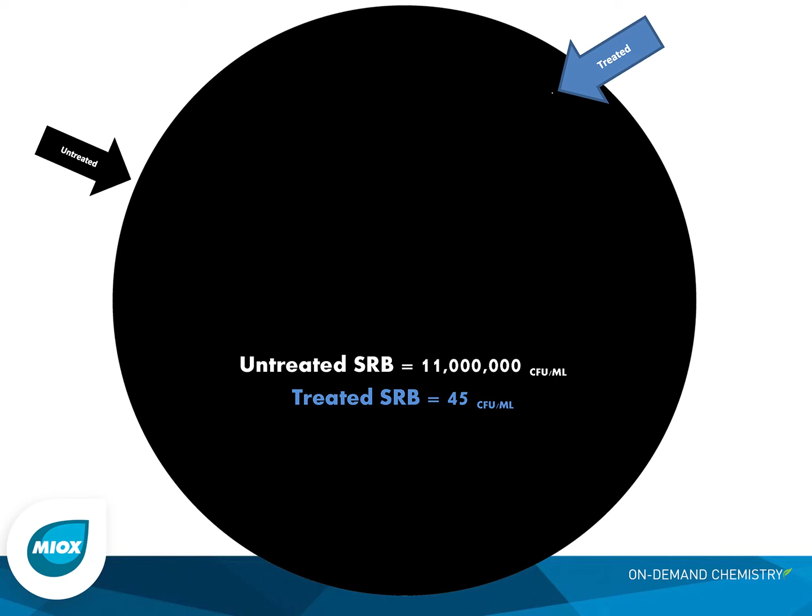That large kill is indicative of oxidant type technology. So mixed oxidant can actually get that type of kill, whereas your conventional biocides can't achieve this level of kill and this quickly.

So what is mixed oxidant actually? So mixed oxidant is actually where we take a salt solution, so we take brine, regular sodium chloride, we electrolyze it through a titanium anode and a titanium cathode, and we create what's called mixed oxidant solution. So we actually liberate sodium hypochlorite and hydrogen peroxide from this solution to treat the produced waters. So we batch dose mixed oxidant into the produced waters to achieve these kinds of kills.

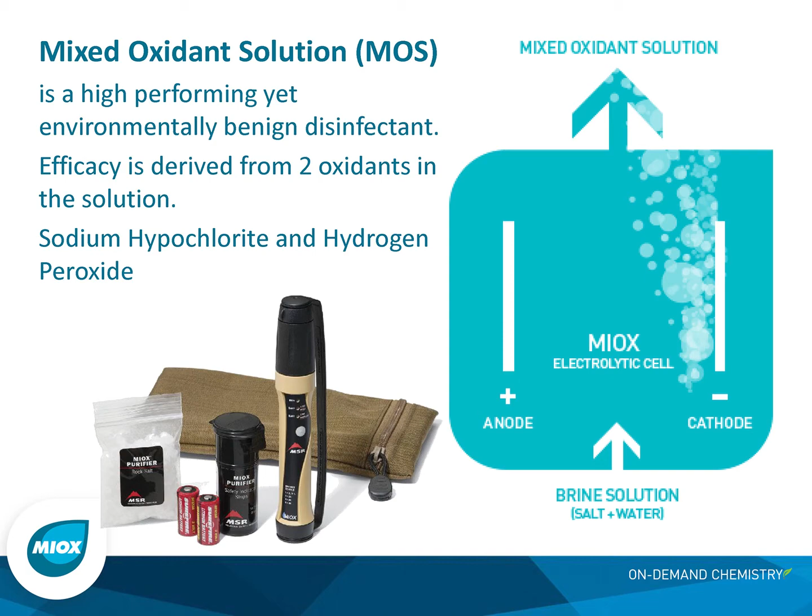Now, what does this mean? This means to the oil and gas industry, Bacillus globigii is much harder to kill than SRBs, APBs, and things like that. So we get a much better kill and much faster, and we definitely have something more than sodium hypochlorite. This test was actually validated in third-party studies by the Centers for Disease Control.

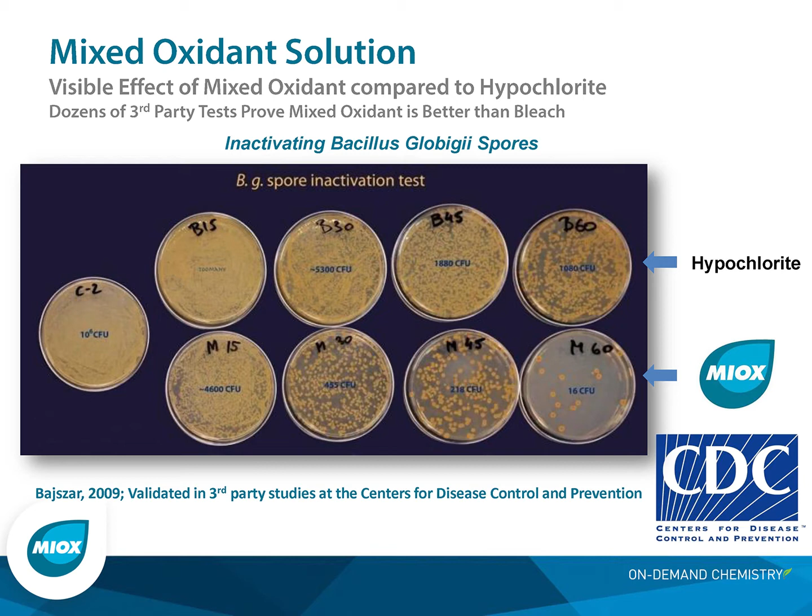MIOX is the leader of on-demand disinfection. We've been in business for over 18 years. We expect to be here at least 18 more, so we're going to be here when you need us. We have scalable technologies, we have multiple chemistries, and we address many, many markets, such as municipal water, food and beverage, industrial and cooling, agriculture, semiconductor, and of course, oil and gas. We have 48 patents pending or issued to date.

We have multiple chemistries, which other companies don't have. So we can do mixed oxidant, we can do regular sodium hypochlorite, we can do an advanced oxidation process, and we can also do an eQUAT, which I like to consider as a dual biocide.

So for an oil and gas application, this is where you actually get that large kill with oxidants, but we can also put a conventional biocide in there that won't interfere with the oxidants and leave that water sterile longer.

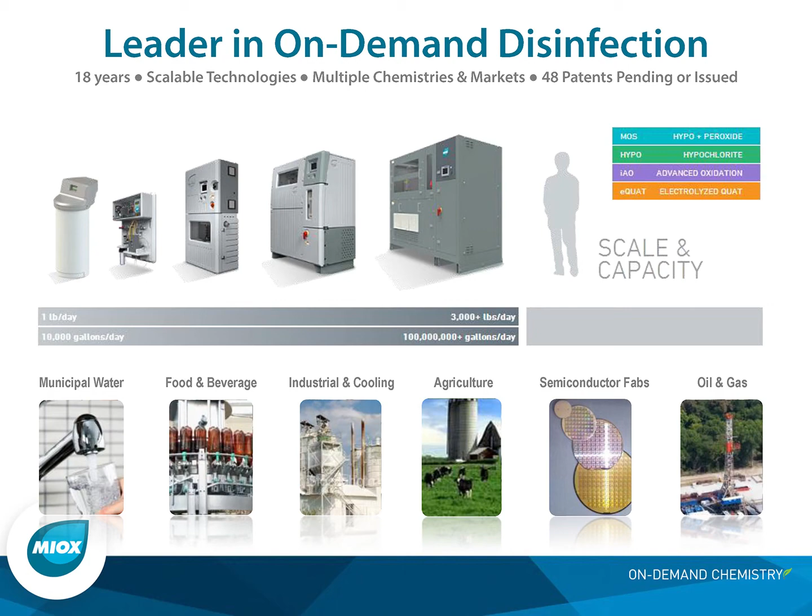The first very large-scale mobile product to come off the product line was the Blackwater unit. The Blackwater unit was designed to treat produced water, flowback water on the fly or on site as you needed it. So some of the things about the Blackwater unit, again, we treat produced flowback water recycling. It could be set at a saltwater disposal well for maintenance treatments or even biocide kill on the surface.

We also could do frac water on the fly treatments with this. We could also do enhanced oil recovery water treatments to be injected downhole or used on surface for odor control and things like that. It generates 800 pounds of mixed oxidant per day, and I'm going to go into a little bit about what does that mean.

It generates a 4,500 milligrams per liter solution to dose with. It needs a 480 volt, 3-phase, 250 amp service, and it requires 3 pounds of salt per pound of free available chlorine and 3.5 kilowatt hours per pound of free available chlorine.

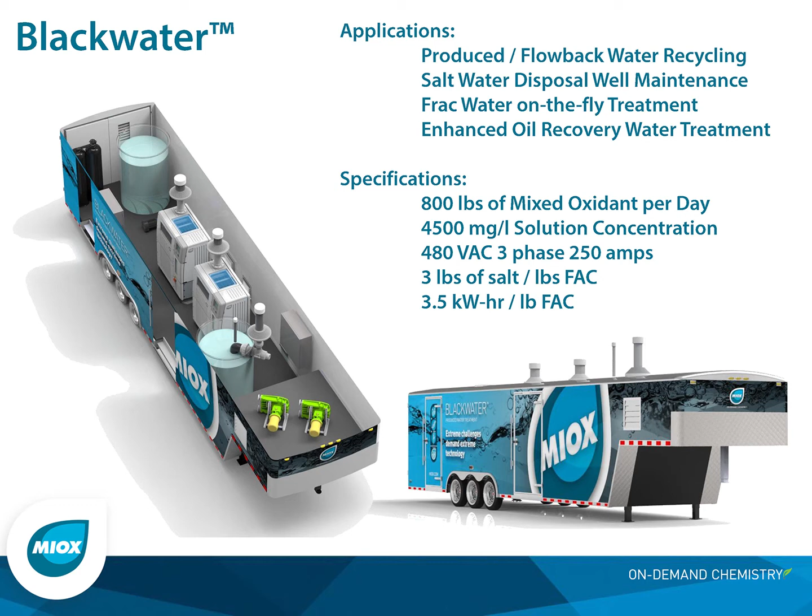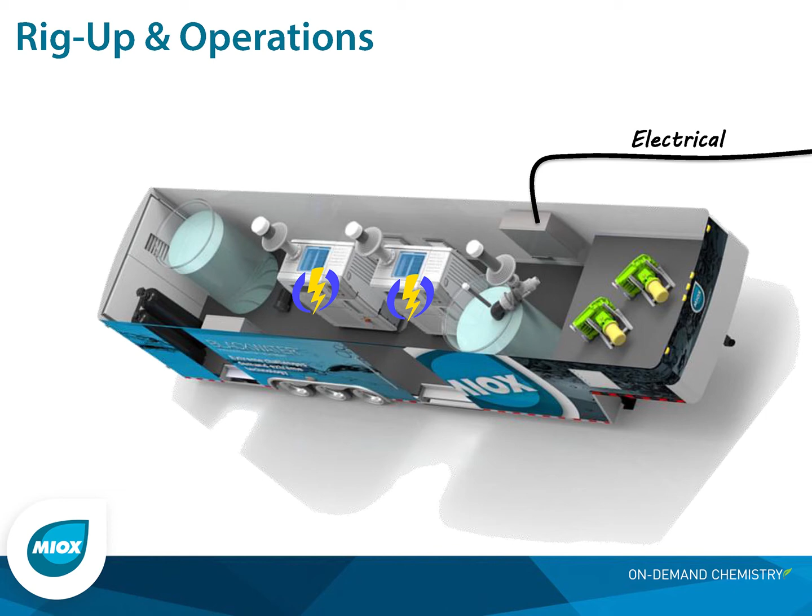So to rig up the Blackwater unit is very, very simple. So essentially you run your electrical connections. This can be a diesel generator on site if need be. You hook up your makeup water, and then you hook up your dosing line. Then you would obviously put some salt into the system, so you can do this either via sack salt, or in this picture we have the dotted line, which is an optional brine line.

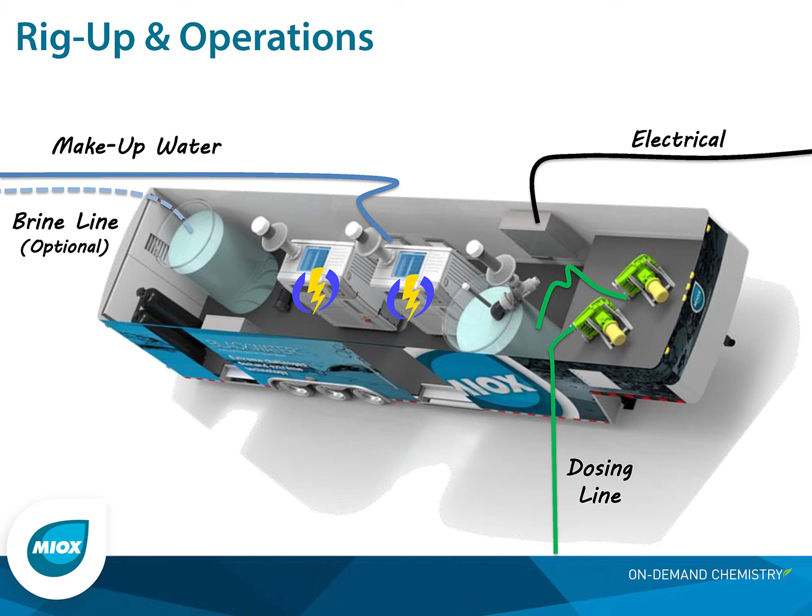So you could actually truck in 10 pound per gallon brine, fill up the tank, or put a big standalone tank on the side of this, and you need very, very little interaction with the MIOX unit once it's up and running. Then you would run your dosing lines into whatever water you want to dose, and the system from there is programmed how you want it to manage or treat the water. This could be done manually, or automatically via sensors. And that's all done with our Allen Bradley controllers on board in the unit.

Well, the one thing about oil and gas is sometimes we actually do what's called a once-through scenario. So you acquire the water, pay for it, fresh water sources, surface sources, things like that. We transport it to site. We probably treat that water with a biocide. We then pump it down the hole, and then it comes back up as produced or flowback water. It's transported typically to a saltwater disposal well. Again, it's treated with biocide there, and then we dispose of it, and it costs to dispose of it.

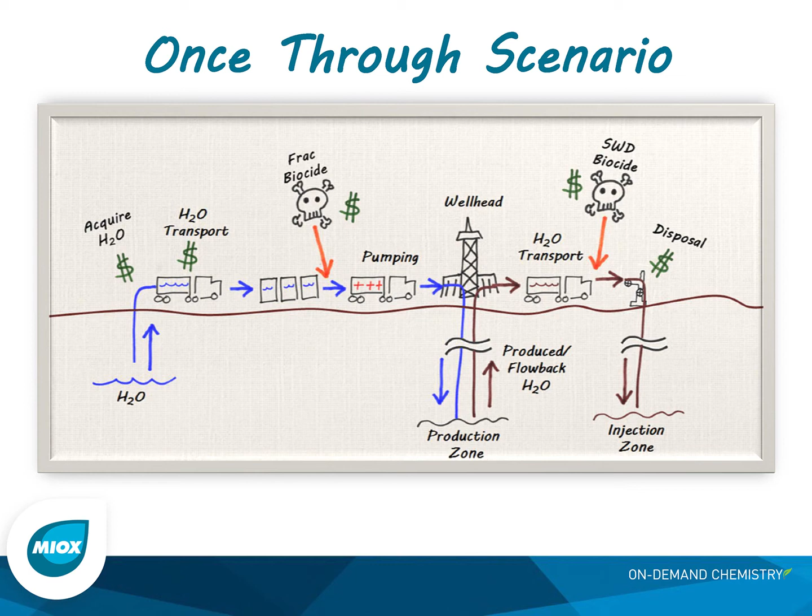Now, this water is a once-through scenario, so it takes fresh water, injects it downhole, that water comes back up, it's no longer fresh water, so we dispose of it. So that water is gone, it's consumed, it's taken out of that fresh water droplet you saw, it's taken out of that life cycle and won't return.

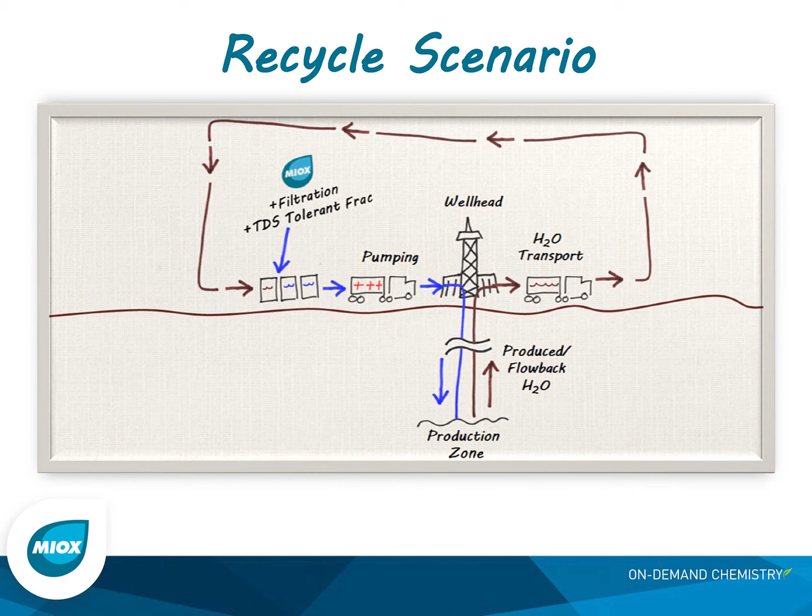Now, what I'd prefer to see is a recycle scenario. So you take the produced water that was being transported to the saltwater disposal well, take it from there, transport it back to site and reuse that water. Now, what does that do? That takes out your water acquisition costs. It takes out one of the transportation costs. It also takes out the biocides that you'd use on the frac location and the backside location if you use MIOX on location for this recycling, and then it gets rid of your disposal costs.

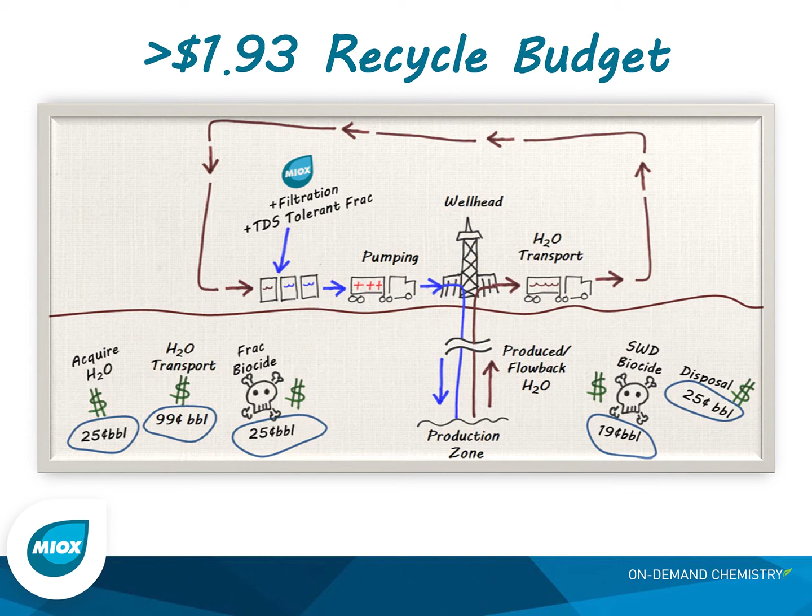So if you add all those costs up, you have almost $2 to recycle a barrel of water, and that's where you fit in a MIOX treatment or a filtration treatment, and it's much less than $2 per barrel to do that type of treatment, and gives you an economic return on recycling water for your frac operations.

So let's compare MIOX to chlorine dioxide. Chlorine dioxide has a very volatile feedstock cost price, especially hydrochloric acid. It can go up, it can go down. But typically, if you were talking a drum of MIOX versus a drum of chlorine dioxide just for feedstocks, we're going to be able to provide a MIOX service much cheaper because we're 1/8 or 1/10 the feedstock cost of what chlorine dioxide is.

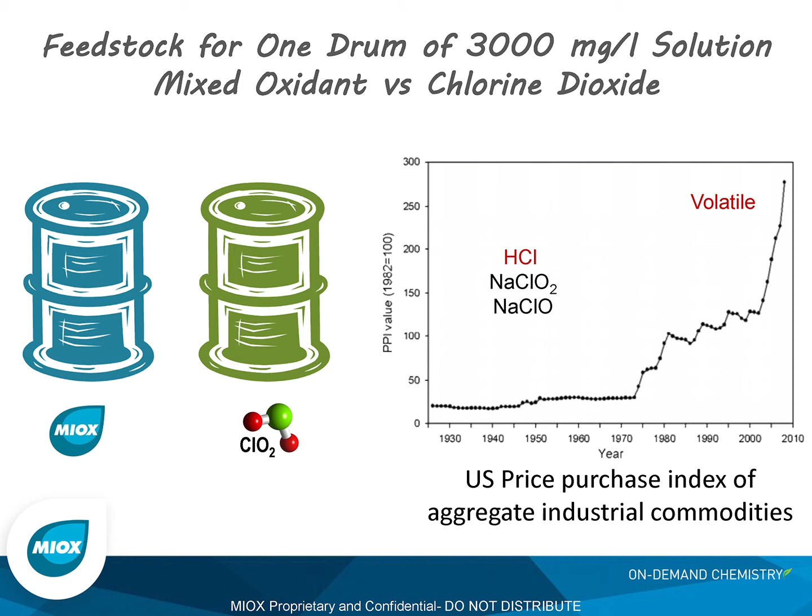Now, what is a typical dosage? So the Blackwater unit can actually dose a lot of water very rapidly. So if we're talking a fresh water or light demand produced water, so let's say 20 ppm dosage, we can do 100,000 barrels a day with the Blackwater unit. If you start getting into some fresh and produced waters, we've seen 20 to 75 ppm ranges. That means we can dose in that 28 to 100,000 barrel range.

75 to 100 is usually real high demand scenarios, and that one we can do 21 to 28,000 barrels. And then in your extreme demand scenarios, we can still even do 5,000 barrels a day. So this is a very inexpensive way to treat a lot of water rapidly.

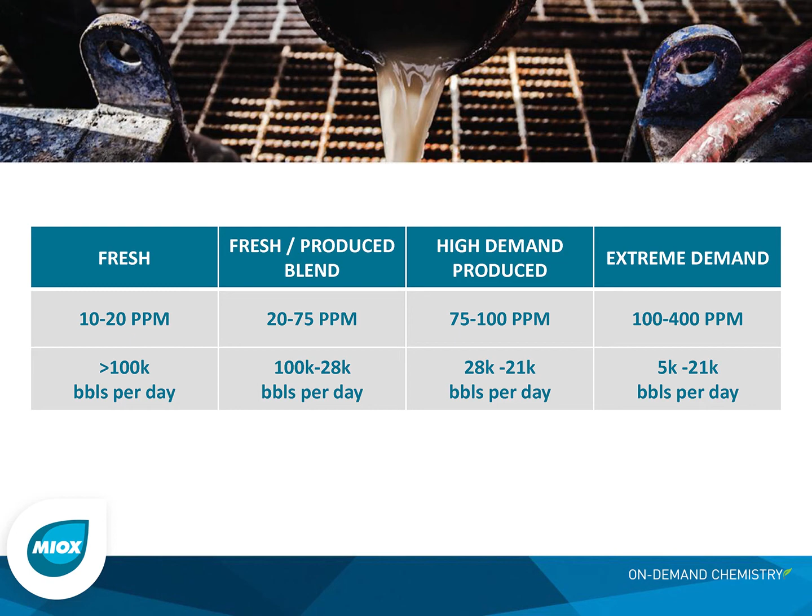One of the beauties of the MIOX technology is it's very, very safe and effective. So when you're talking about health and safety rating, our NFPA for shipping, our label rating there is 100. This is the same cleanup as if you spilled water on location. This is generally even safer than the produced water on location, so you don't have any nasty chemicals to worry about for your employees. This is a very low manpower unit. You can stick your hand in the oxidant without burning yourself. All you have to do is wash it off.

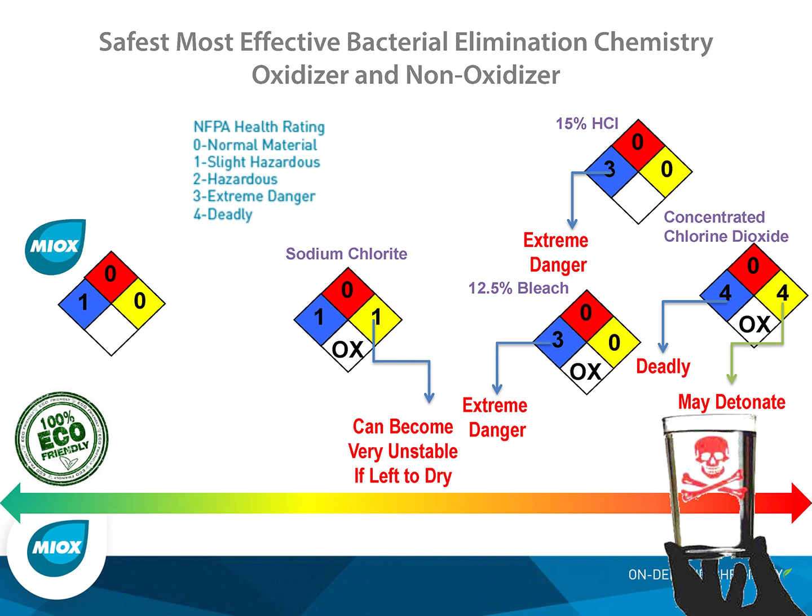So the chemicals needed for this are just salt, water, electricity, and then you have an oxidant solution that's safe. Unlike some of the other things that you have on site, whether it's bleach or HCl or chlorine dioxide or ozone, those things don't have the same safety profile that we have.

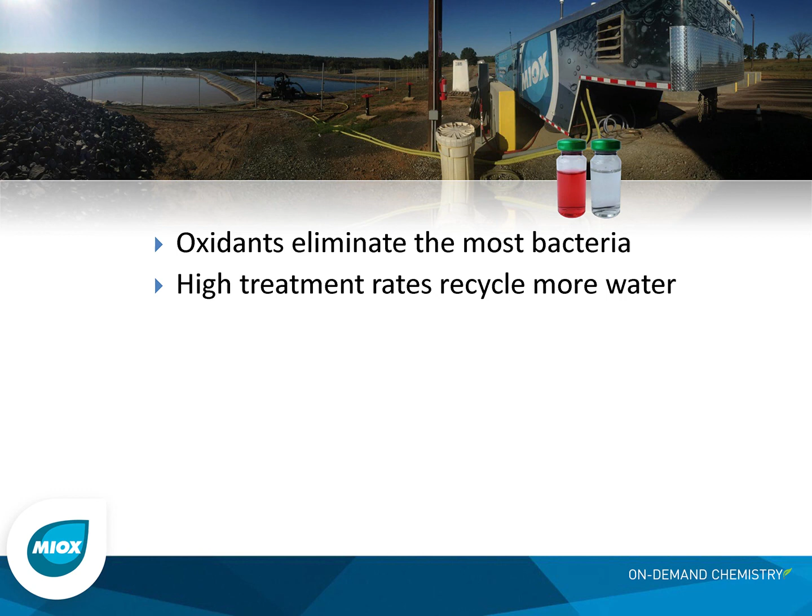So just an overview here: oxidants eliminate the most bacteria, period. We kill it rapidly, we kill it fast, and we kill it almost completely. We have high treatment rates, so we can recycle more water faster and more economically. We eliminate the H2S. We reduce the iron, which can cause scale. We reduce the chemicals on the road. You're predominantly shipping lots of water, lots of chemicals on the road. We can generate this on site, so it's not on the road. It's a safer process, and it's lower cost to you.